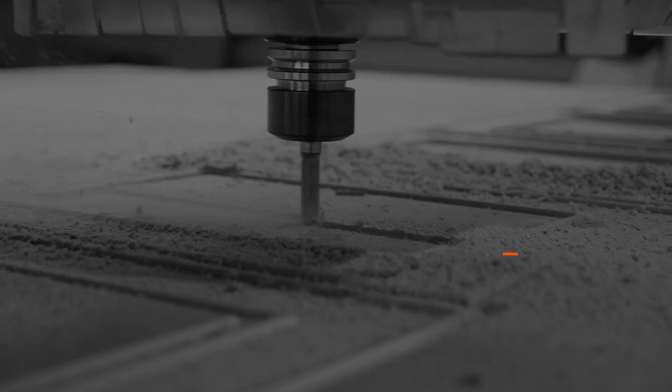When you're cutting something out on a CNC router, it needs to know what material it's cutting it out of, not just what it's made out of, but what shape that material is. And it also needs to know where 0 is, so that the computer and the machine, the robot, can agree on what that point is. If you get that wrong, it will try to cut a big hole in your table or move to a place that you didn't anticipate, and can cause a lot of problems.

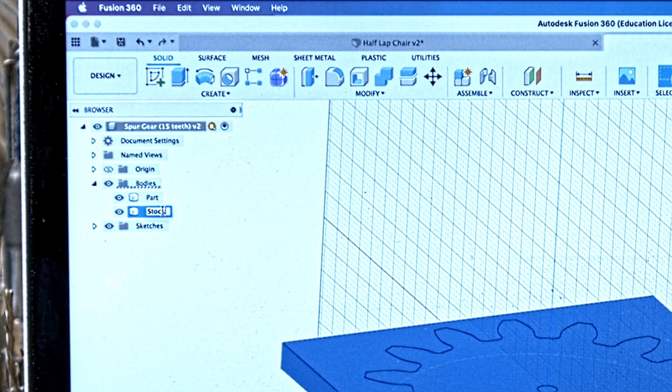So I like to design my program using a part that you're cutting out that you're interested in creating, and a stock or a piece of raw wood or plywood or whatever that you're cutting it out of. Make sure that your measurements are correct for what you're actually going to use. I would use I for inspect on the keyboard, or inspect measure, to determine the thickness of your material by clicking on this line right here. And it's going to tell me that's 1/2 inch, so I'm cutting it out of 1/2 inch material.

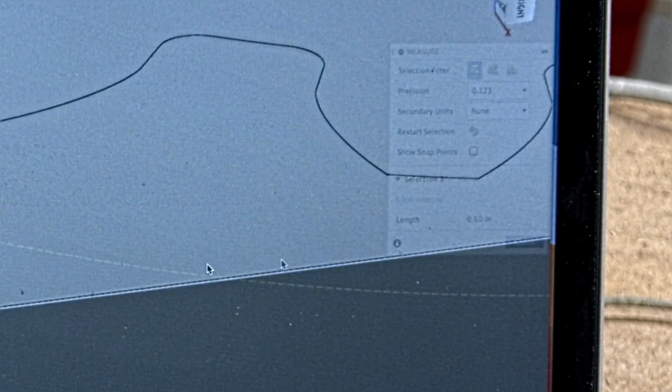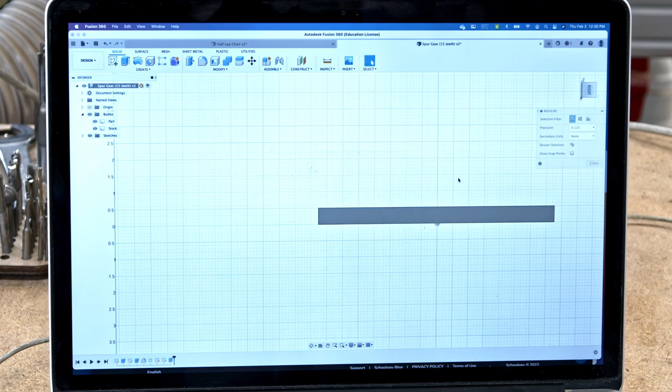And the size of my stock, using I for inspect, I can click on this and say it's about 7.5 inches in both directions. So that is what we're going to need to put on the machine to be able to cut it out. Okay. Once you've got your piece positioned exactly in the middle of your stock, you are ready to move to the manufacturing workspace in order to cut it out.

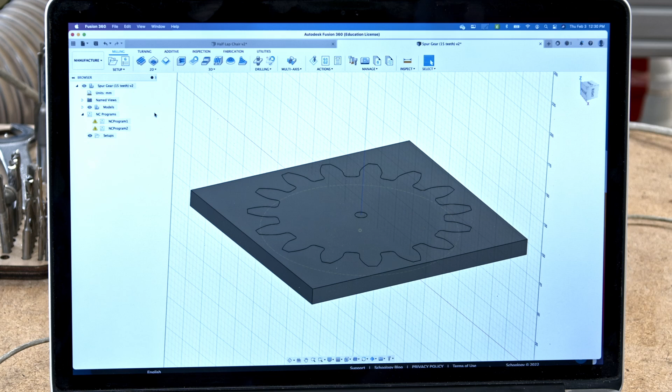So in the top left corner of your screen, you're going to switch from design to manufacture. And in the manufacture workspace, you've got a whole different set of options and a whole different set of requirements in order to make a program for the CNC router. So you're going to go first to create a setup. A setup includes the size of your stock, which part you're cutting out, and the thickness of the material.

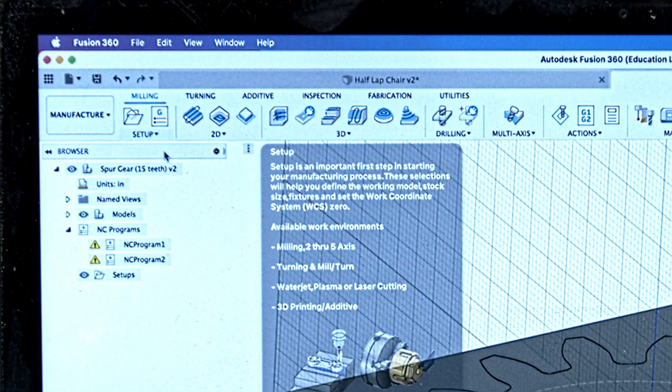First, you need to make sure that your units are in inches. Our machine runs in inches, so you've got to go to your units up in the upper left-hand corner and click the little notepad and change your units from millimeters to inches, set as default, and click OK. Then we're going to start our setup. Go to Setup, New Setup. This is going to show where our part is, where our stock is, and where our work coordinates are located. The blue, green, and red arrows are the work coordinates.

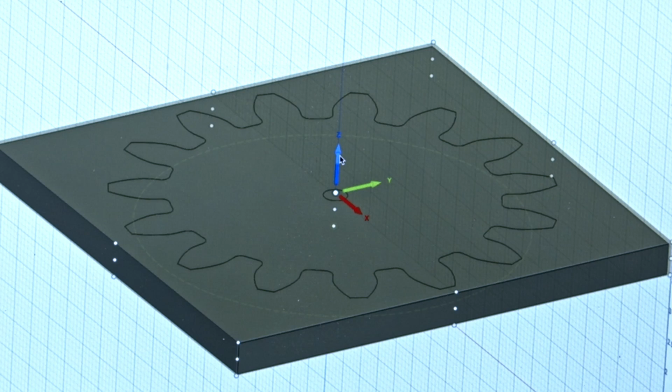In this case, I don't have a long axis, so I can position my X and my Y in either direction. I need to make sure my Z is going up and down. If it's incorrect, you can flip arrows by clicking on the pointy end of the arrow, and you can orient them by clicking on the other end of the arrow and then orienting it with a line. That would be incorrect with the Z not going straight up and down, so I can reorient that to a vertical line and then flip it to get it going in the right direction.

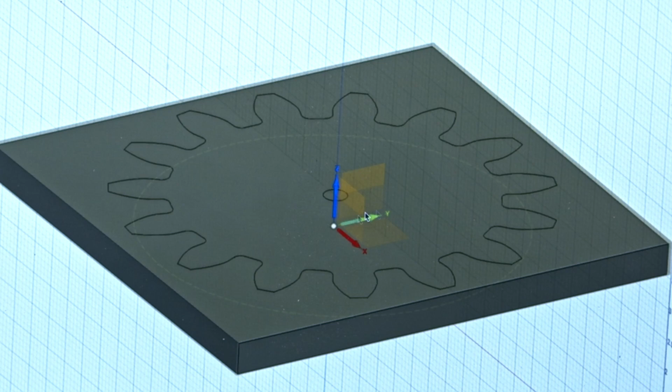I want to set my 0 to the table and the corner almost all the time. And I want my X and my Y axes to go in the positive direction. So if I were to move it here, I would find that my X is going in the wrong direction, which I could flip, or I could just move this by clicking on the white dot and moving it to the corner over here to a place that does make sense.

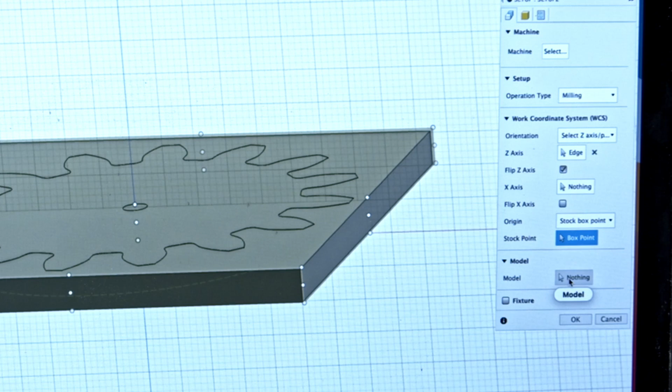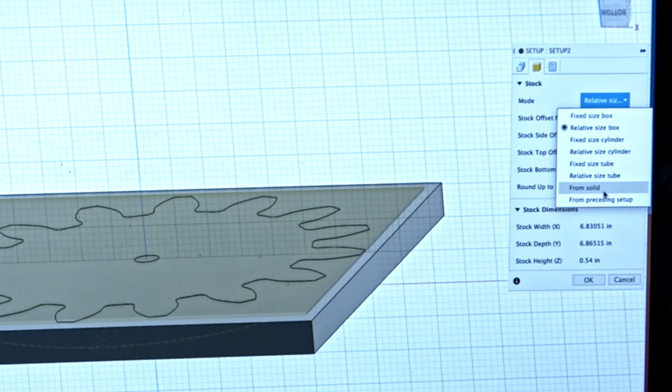I need to select the part that I'm cutting out by going to Model and then clicking on Nothing here. And then I can select either from my browser on my screen by finding the part, or you can click on it directly on the screen if you're careful. Next thing to do is to set your stock size. That's the second tab over. It's going to do a relative size box by default. And I usually use From Solid as a tool to find the stock that I'm going to be using. So From Solid, and I'm going to select my stock either from the browser or from the piece on the screen.

Once you've selected your model, you've moved your work coordinates, and you've selected your stock, you are done with your setup. At this point, it usually makes sense to turn off the stock that you've modeled by using the eyeball in the browser on your screen so you can see your part more clearly. OK, the robot's going to know where the 0 is, where our stock is, and where our part is. Next thing we're going to do is give it actual instructions to cut something out.

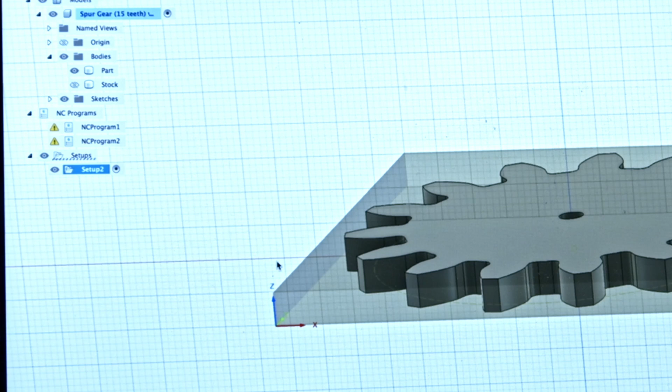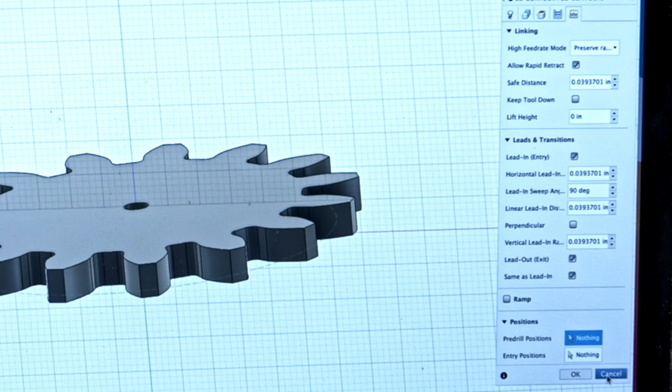Now, there's lots of ways to create these instructions. I can click on one of these options here and find the one I want, and I can input all of the data that I would need, and you can see it's quite a bit of data in order to cut this out correctly. Or, as I would highly recommend, you'll use one of my templates that are found usually on Schoology. By going to Schoology, you can go to the CNC Toolpath templates or whatever folder I've got it stored in, and then you can download one of these templates here.

To download from Schoology, usually you've got to click on it once. I'm going to use my contour toolpath, and then usually you have to click on it one more time in order to actually prompt a download. Then opening that file directly will do nothing but confuse your computer. You need to go back to Fusion in order to open that correctly.

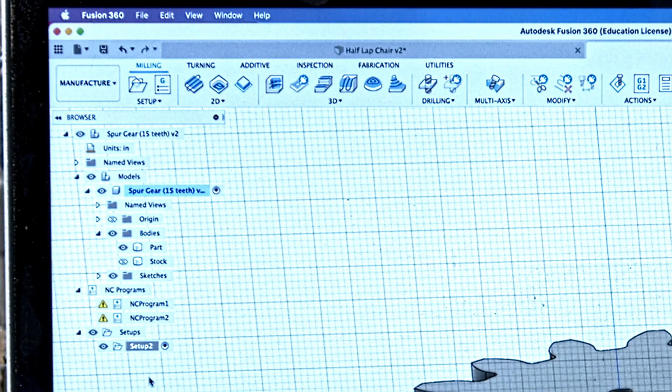And then you can right-click on your setup. Not the setups plural, but the setup you just created. And then say Create from Template. As you can see, I've already downloaded all these and created hundreds more of them. But you're going to need to go to Select Template.

And it's a little confusing, but you need to click on Local in order to get a local file, and then usually click on Import in order to import that file. Then I'm going to go to my downloads, find that contour toolpath I just downloaded, open it, and select it. And now it doesn't really seem to show up. And the last confusing step is it's hidden inside of your setup, and you have to click the down arrow to find it.

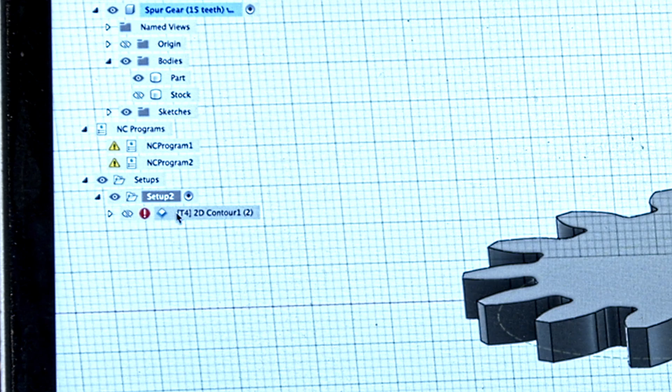When you're cutting something out, you need to think about how the piece is going to behave as you cut it out. If I were to cut this thing out and then cut the center, the circle would move as I was cutting it because the whole part would be moving. So I need to make sure that I cut out my center hole before I cut out the outside contour of the shape. This means that I need two different toolpaths in order to properly space those cuts out.

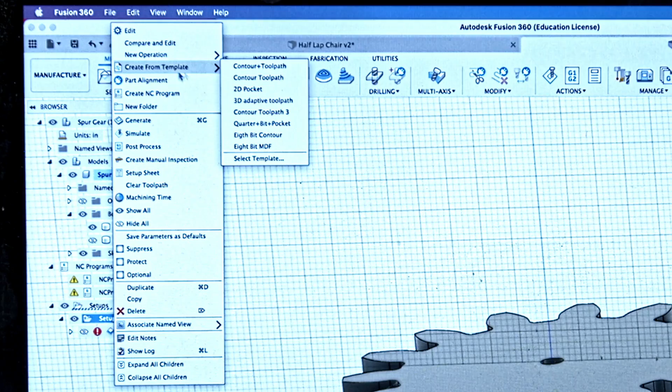So I'm going to right-click on Setup 2 and Create from Template, and I've already downloaded it, so I'll see it right here. And now I've got two of these. And both of them are empty, so they have this error next to them. I've made it very easy for you at this stage. You don't have to know any of the numbers. You just right-click on that contour and edit it, or double-click on it.

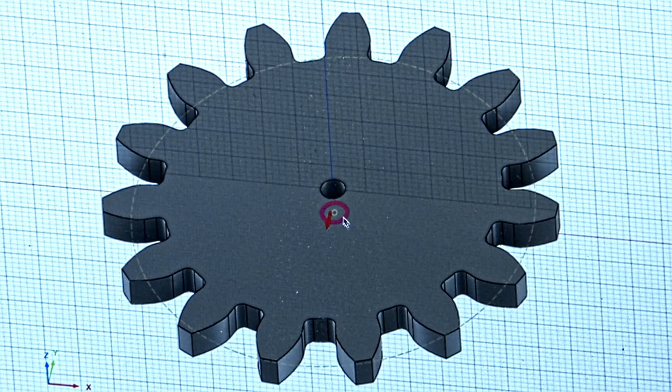And then we're going to go to the second tab, which is Geometry, where you actually select what you'd like to cut. It won't do anything if you click on the top circle. It will work great if you click on the bottom circle at the bottom of that hole, like so. If you click on the red arrow, it'll mess something up. If you've done your setup correctly, it'll already know that you want to cut out the inside of this hole and not the outside of this hole. And then you can say, that's all I need. If I had more circles and more interior cuts, you could add them to that toolpath.

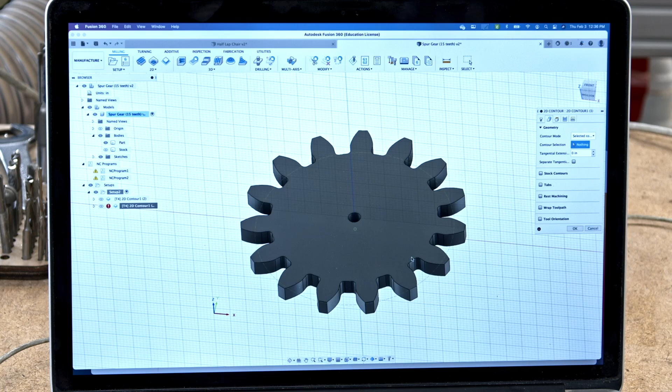Next, I'm going to move to my 2D contour below this one. I'm going to edit this. Again, go to Geometry, and instead of clicking the bottom of my circle, I'm going to click on the bottom of my outside profile. All the rest has been done for you. All you need to do is click OK, and now the machine knows what to do.

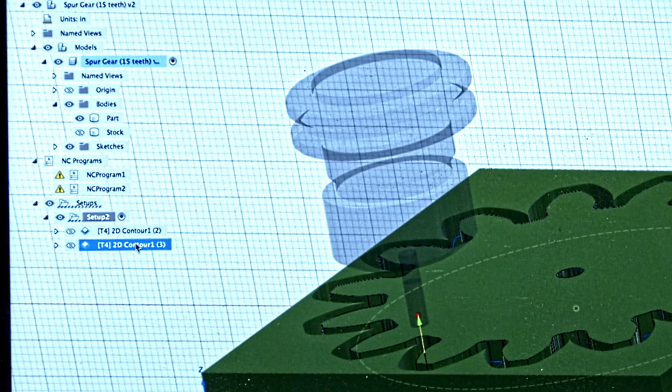A few things you can do to check that it's ready are to double check that your setup has the 0 at the bottom of the stock. Double check that the first one cuts out the middle and the second one cuts out the outside. You can actually drag these to either side of each other if you need to move them. Also, you can double check that the machine is cutting out only 1/4 inch deep at a time. Because my material is 1/2 inch thick, it's going to show 2 blue toolpath lines as the process for cutting this out with a 1/4 inch bit.

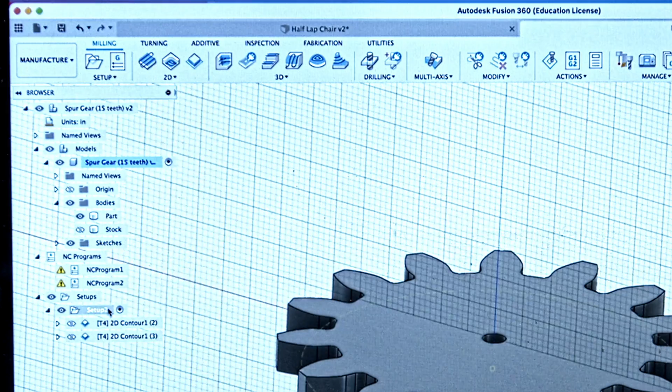The last thing that you can do to check is to simulate your file. I'm going to right-click on Setup 2 and select Simulate. The fun thing to look at is to go into Statistics right away, and it'll say that this cuts out in 55 seconds. Pretty fast. It also takes 7 feet of motion in order to cut it out. That's not super necessary to look at. Mostly you want to look at display, and I find the most useful way is to not show the toolpath and do show the stock.

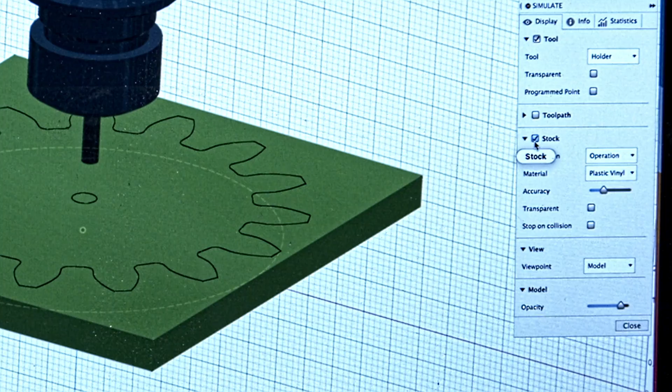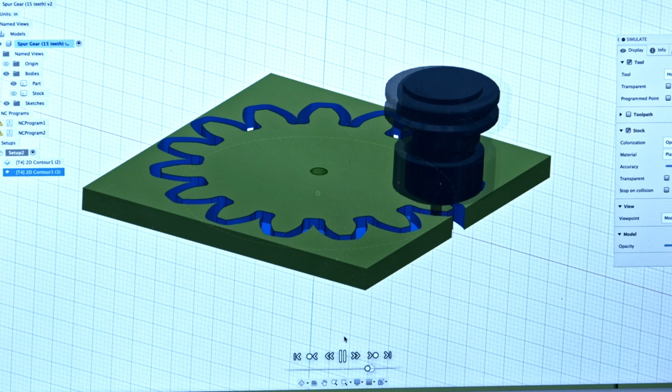And then you can run the program by clicking the play button to make sure that it's doing what you want. That's kind of frenetic and fast, so let's slow it down a little bit using this bar, and we can watch it cut a little slower. That's a little too boring. Let's speed it up a little bit. And watch how it cuts around the edge. Looks like it does its first pass, and then it plunges deeper and does the second pass, and then it is all done. So everything checks out there.

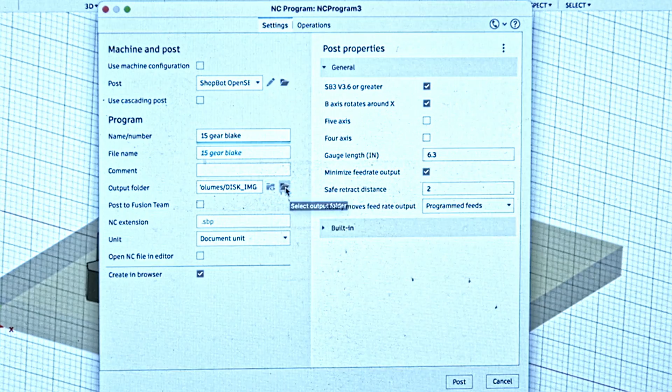We're ready to post-process our program, which is just writing the actual code that the machine can understand. This used to be a long and difficult process, and now it's just a few clicks. Right-click on your setup if you'd like to do the whole setup at once, and hit Post-Process. You'll need to find the right file using the 3 dots over here or the open folder, and it's ShopBot Open SBP. If you need help finding that, you can ask questions, and I'll show you where that is. And then change the program to the name, and usually include your name too, so it's easy to find on the computer. Then I'm going to output it onto a flash drive and post-process it from there.